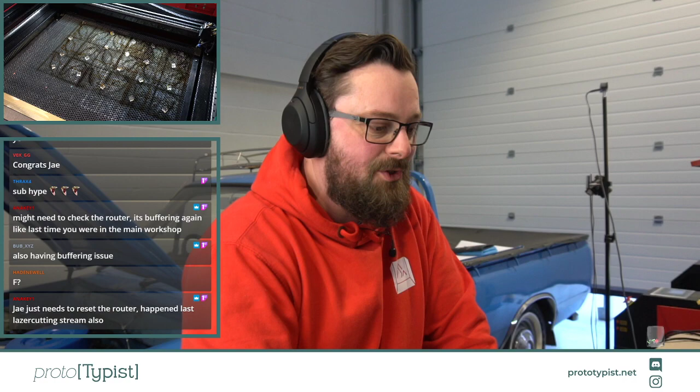Should be back, I should be back.

So it turns out the issue I had was actually the router - the Ethernet cable plugged into the router had come apart from its adapter. It's two cables plugged together, and the connector had broken. Well, I say broken - it's like a little dongle that connects two Ethernet cables together, and it sits right where the door is. The door had shut on it and cracked the casing a while back, so unless the casing is clipped together, sometimes the cable falls out. That's what happened, and it dropped over to Wi-Fi, and the Wi-Fi was dodgy with the laser causing interference. Anyway, we're back and we're live.

I've just run around and I'm out of breath now, but we are all cabled up again and we are back.

So as I was saying before, we are going to make a 3-tiered keyboard stand today. We're going to bust out Fusion, sort all that out, and make some cool stuff in there, hopefully. Bear in mind, guys, I'm not a Fusion expert, I don't use it very often, so this may be a slow process. It might take me a little bit of time to get there, but I'll try to show you what I do, and we'll get the laser cutter going.

You can see we have the laser just over here on the other camera, and you can see where I was cutting stands out of wood. I have some stands made out of wood that are just one tier effectively - these came out pretty nice and neat, pretty clean. I'm using these in my office for my personal collection of keyboards. These ones aren't for sale because they're not as strong as the acrylic ones. But today we're going to use this wood to create some larger ones, the 3-tier ones.

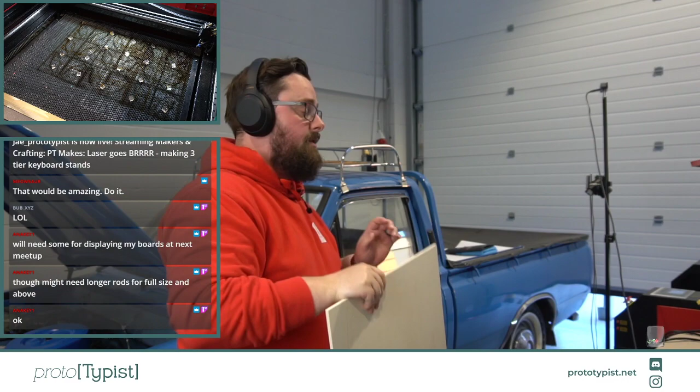Just bog standard plywood. We used this for the trays we did the other week when we made a jig for the trays, so we've got loads of this left over. We're just going to use this for the first couple, test it out, see how they go, and if they work really well, they'll be quite a bit more expensive than the 1-tier system. But if they work well, we'll make multiple. Maybe I'll have a very small stock of them on the store too. I don't know, haven't decided yet.

I'm still out of breath. I'm still exhausted from running.

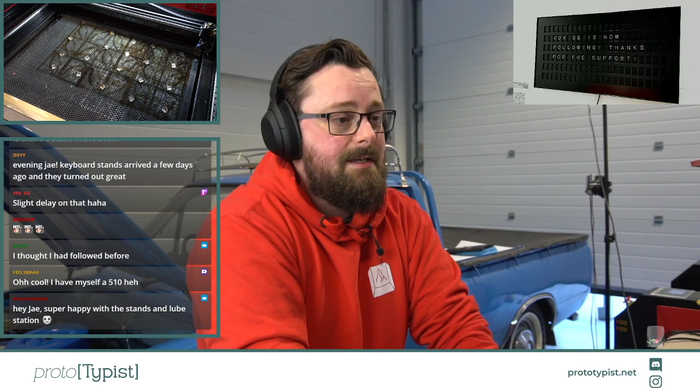FeelsBrah says, oh cool, I have a 510 myself. So I have a couple of Datsuns. I have this one, and I also have a Datsun Fairlady Z, a 1976 model, so it's a 280Z from Arizona, not California. It's an Arizona car but it's here in the UK. It's left-hand drive, but it's my pride and joy. It took me years to restore it, I absolutely love that thing. I also have another one, it's not a Datsun but it's a vintage Nissan, a 1965 P130, which is actually the line that became the Cedric Stroke Gloria line.

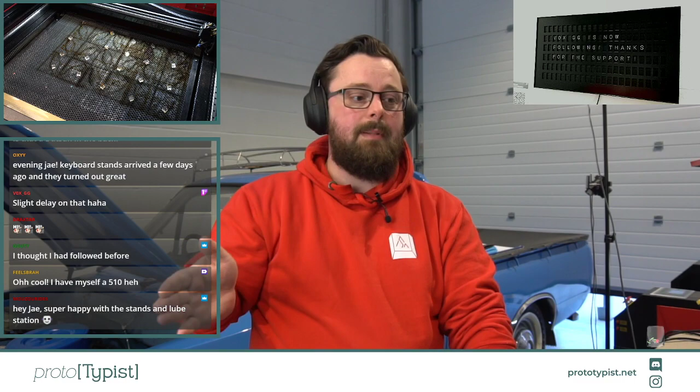Glad you got them, I apologize if I didn't put a note in your order or anything. I get so many orders for the stands, we've sold 500 stands in like a week. Every day I keep putting more of the black ones on because I had loads of black acrylics. So every day I put like 20 more on in the morning, and by the afternoon they're almost all gone - I think there's like 5 left on the store right now. And I only put 20 on. This is an example, this is just the left-hand sides, this is what's been cutting all day. I've got a stack like that, 2 stacks like that, so they'll be back on the store tomorrow.

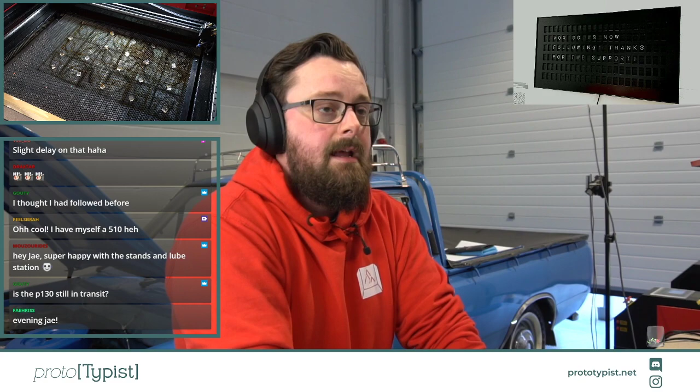Is the P130 still in transit? Yeah, it's still in transit - well, it hasn't actually got on the ship yet. It did have a bit of an issue, it had to go for a load of tests before they can ship it out of Thailand. This is basically an export test to prove it's going to be safe and reliable on the ship and all that kind of stuff. So it was going for that test, and the day it went, the area in Thailand had the worst rainstorm they've ever had, and the road the car was on flooded.

The car flooded, the engine flooded. Right now I actually have a little video on my phone of the guy who helped me buy it over there, paddling water out of the back seat of the car. It wasn't deep inside the car, but it was sat on the floor panels for about an inch, so he was paddling the water out. All of the electrics worked, but the car wouldn't start or turn over. So now the engine's being stripped down and rebuilt - it had bent and pushed a rod due to the extra pressure of water inside the engine. It was just bad luck, hugely bad luck all around. It wasn't the guy's fault, he was literally taking it to the test and bringing it back so he could export it and get the paperwork signed off. Then the rainstorm hit and the road he happened to be on flooded.

So the car at the minute - the bodywork's fine, all of the carpet's been ripped out, the water's been drained away, there's no rust, no damage or anything like that. The paintwork's a bit dirty but it'll all clean up and polish nicely. New carpet is getting put in, and the engine - the head's been pulled off, the pistons have been pulled out, the camshaft's been removed. The new camshaft has already arrived. The new pistons, rods and rings and everything else should be there early next week, then it'll be rebuilt and tested.

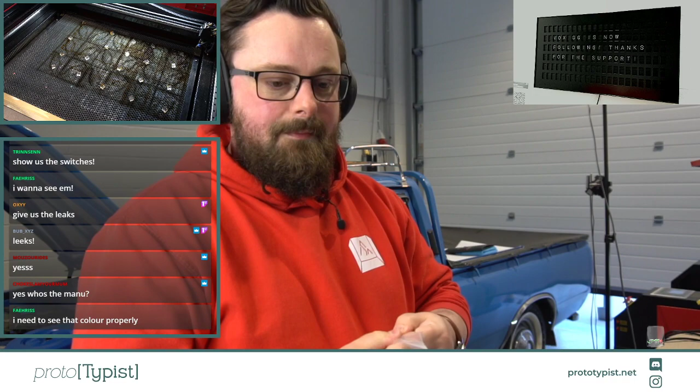Are you going to tell us the name of the switches yet? No, do you want to see the switches? I'm not sure I should, because I'm pretty sure they're secret and I'm not supposed to show them yet. Should I show them? Do you want to see them? These are like a new switch that I can't really talk about yet, I'm not sure when I can even put them in stock. Should I show them on stream? Let me grab a couple, let me find the box of them. Where did the box go? Here we go, okay, I got some spares. They're nice, they feel good too. Linear or tactile? Yes, they are one of those two options. They are not a clicky switch, but they might be linear and they might be tactile. Who knows? Do you want to see? Should I show?

Quite cute, translucent, a very, very pale blue. They are not ocean blues. These are not ocean blues.

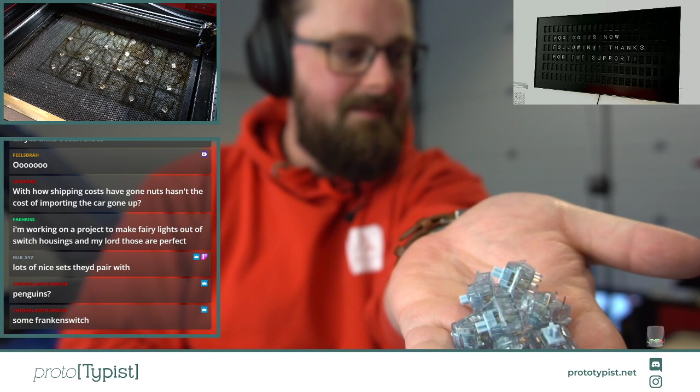They are really pretty switches. Like a group of them just looks great. Try and get it on the camera. There you go.

They're not penguins, they're not some Frankenswitch. These are in stock, I have thousands of them, like 15,000 of them, so I have plenty of these. Yeah, they're not Akko Ocean Blues though.

Shoko vibes, yeah, they will match Shoko very, very well. They will match Shoko really well. They're not penguins though.

With how much shipping costs have gone nuts, has the cost of importing a car gone up? So importing a car is really interesting. There's two types of way you can import a car on a ship. You can either get a container, put the car in the container, and then ship the container, or you can use a RoRo, which is a roll-on, roll-off, which is where the car's driven on, and then it's driven off the other side, like a ferry.

And container shipping has increased prices significantly. Like what used to cost me £2,500 to ship in a container now costs me closer to £20,000. That's how much it is. Like when importing stock from China, instead of paying £2,500 for a container, I'm now paying 20 grand for that same container, exactly the same container, no differences.

The roll-on, roll-off ships have actually stayed about the same in price, so it's only about 2 grand-ish, £2,000 to get a car over. So yeah, it would actually be cheaper.

This is the fun thing. It would actually be cheaper for me to buy something like a transit van in China, have all of the boxes loaded into the back of the transit van, and then roll on, roll off the car over on the RoRo ship and get that imported. That would be highly illegal, and I can't do it. But it would be significantly cheaper than current shipping prices, and that would include I'd get a free van, right? I'd get a free van, so that would be cheaper.

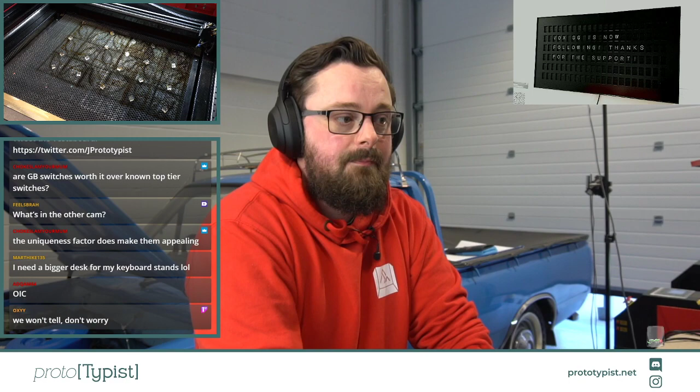FeelsBrah says, what's in the other cam? So in the camera, just up here, this is my laser cutter. Let's flick over to the other camera, you'll be able to see, so this is my laser cutter. We're going to actually be cutting some bits of wood later on, and I'll show you guys how that works. We're going to be cutting some plywood when we've done the design in Fusion, so we're going to do some Fusion design first, and then I will show you guys how the laser works.

The uniqueness factor does make them appealing. Group buy switches are up to you. Like there's so many in-stock switches, you know, it's a take your pick type of choice there.

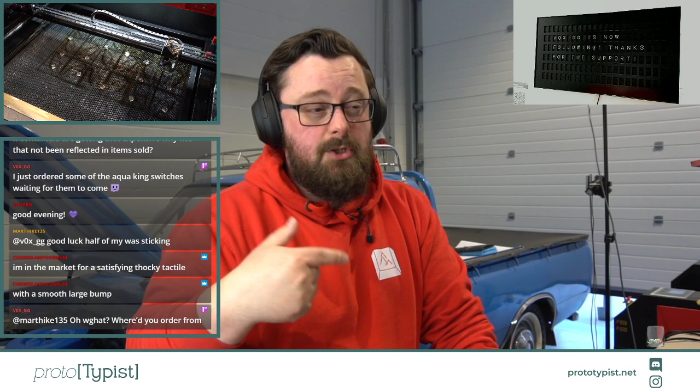So yeah, if containers are getting that expensive, why has that not been reflected in items sold? I think for a lot of stuff it has, for a lot of things it has. In terms of my business, the way it works is a lot of the stuff that we sold a year ago is now shipping, because that's just how long group buys take. And when I sold the stuff a year ago, the prices hadn't risen as much, so the prices didn't go up then. I'm betting now that the prices will go down before the stuff that's due to ship will ship, and if it doesn't, then I will just swallow the cost. Like that's all I have to do, I'll just have to swallow the cost.

Marthike says I need a bigger desk for my keyboard stands. Just buy more keyboard stands.

Vox says I just ordered some of the Aqua King switches, waiting for them to come. Nice. So thank you very much for being here, man. Good to see you, dude. Good to see you.

I'm in the market for something satisfyingly thocky tactile. I'm not sure if you saw how these depressed when I was pressing them, but you might be able to tell whether these are linear or tactile just from watching how they move when I press them. That might tell you whether it's linear or tactile. With a smooth, large bump. Interesting, interesting.

KP Republic, AliExpress, the top housings are too tight. Interesting, seems like a big boy bump. Who knows? Until I get them into stock, who knows?

I haven't actually tried them in a keyboard build yet. These only came into the warehouse yesterday, so I haven't actually done anything other than have my assistant Mel split them into packs of 70, 90, and 110. So Gouty, there you are.

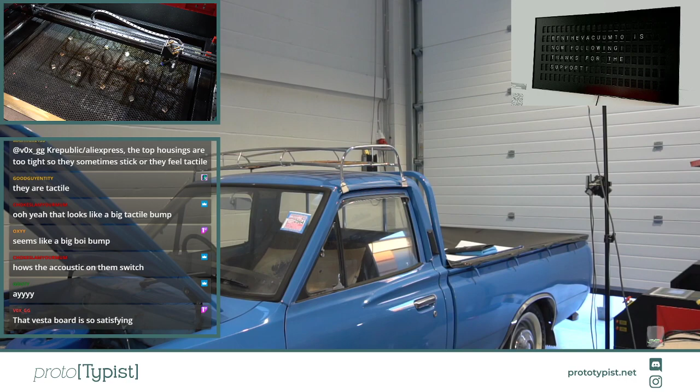But once I can, I will do. I actually have some other tactiles that you might like coming in stock as well. So these are a little bit different, I can talk about these. But these are POM Duroc linears, also called sunflower switches.

And these are all POM, like creams, but not creams. These are Duroc switches, and these are tactile as well. These have a really big bump on them. So there you go, you may be interested in those.

These are really quite interesting switches. These are the POM - I can't talk about the other switches, the pale blue-grey switches, but these are sunflower switches. These will be in stock probably early next week. They're all bagged up, but they just need to be counted and everything else. So yeah.

But I can't talk about these just yet. More news soon, but I can't talk about them just yet.

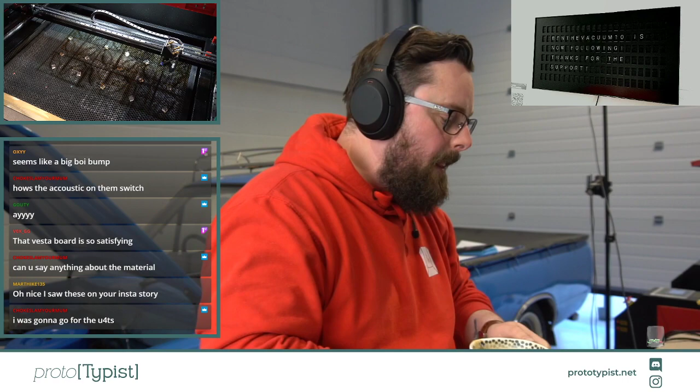Okay. So, what we need to do now is move over to the other camera and bring up Fusion so that I can show you guys exactly how we're going to work today.

Okay, so you should be able to see Fusion now on stream, and you should be able to see the original shape of the keyboard stand. So this is the keyboard stand that we currently make and manufacture, which is this here. It's actually the other side that you can see on. Because they have a logo on, we have to make sure that they're on the right side, otherwise the logos will be back to front.

So you can see here that they're actually cut in mirror images of each other, apart from the logo, which is changed around so that both sides show the logo in the correct orientation. New stands - well, these are the stands that we've made before, and that's what you can see on stream right now. You can see the same stands that we've made before.

But what we're going to do is we're actually going to create a 3-tiered system for these. So what I'm going to do is I'm going to edit the sketch that these are on. And bear in mind that I am not a Fusion expert, so I'm not teaching you guys how to use Fusion here. I'm just going to show you how I am going to approach this problem.

So because we're going to make these bigger, I know that I don't need the rear line or the base line for this keyboard stand. I have a reference point here in this corner. That's always going to be my reference point for where that flat horizontal line starts. I don't need to change that, but I don't need any of the other shapes here.

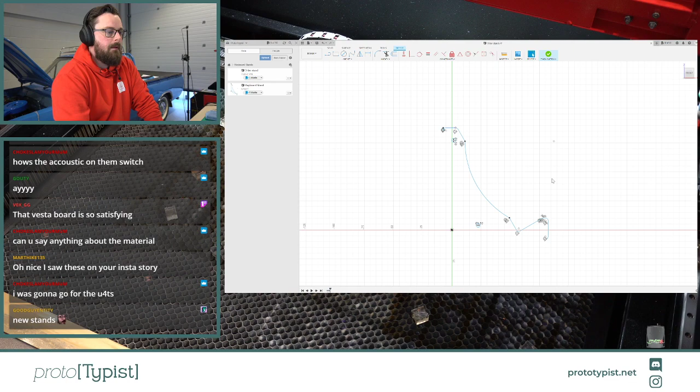So what I can do is I can remove all of the other shapes and just end up with what looks like a flat line running across the top of the stand. So for reference, that line there, that's selected and highlighted dark blue at the minute, that's this line here across the top there, just that little line there. And what we're going to do is we're going to actually replicate this part of the stand.

Basically from here onwards, this swooping curve, and then up and then swooping up here, we're going to replicate that and put it on top of this part here. So we're going to take that shape and put it up here.

What we're going to do is just edit this sketch and basically copy that shape across. We're just going to select the lines that we need. So we're going to zoom in a little bit, hold down Control, click on the lines that we want to select.

Make sure you get all of the lines. Not able to select this one. Zoomed in way too far there. Thank you, infinite scroll wheel.

And then we're going to just grab the same lines up at the top because we want to make this a 3-tiered keyboard stand.

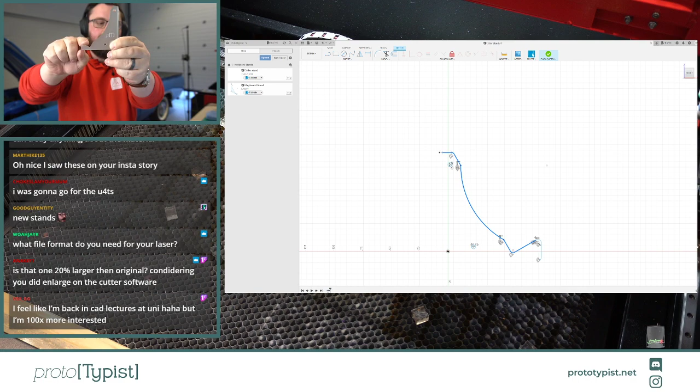Okay, so now what we've selected is that whole swooping shape here. We've selected basically the line down, the line up, and then across here. What we're going to do is take that and drop it onto the end of this line up here. So we're just going to literally copy and paste these in.

And we're just going to move that up and move it across, and line it up so it's nicely attached, he says. So you see, we're just going to attach this to there. It doesn't have to be perfect.

This is just a prototype. I'll get it perfect later on if I need to. I'm just going to bob that across. We're going to just drop it down just a touch because we want it slightly below, so we can put a radius in, just something like that.

Then what we're going to do is we're just going to delete this line here, he says. Okay, so now we've moved that shape over, we're just going to delete that.

Wait, where's that gone? Where's that gone? Okay, we hit the wrong button. We still got on paste? There we go. Okay, so we're just going to move that again because we are an idiot.

As I say, I don't use Fusion very often. I can barely wiggle my way through it at the best of times. And I'm not particularly accurate with it, but hey, we're good.

So we're going to move it to about here, and then all we're going to do is put a radius on this corner here, just to make sure it's all aligned nice and neatly.

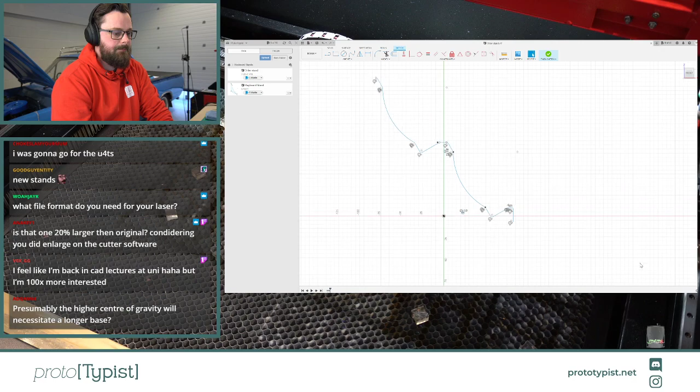So what we're going to do is we're just going to click OK, and leave that there. You can now see that we've basically got 2 stand shapes going up and up again. And what I'm going to do is I'm just going to join these 2 together nicely.

Now to do that, what I'm going to do is just delete that line. I'm going to insert a new line, but extend it further than it needs to be, so we're going to have a nice horizontal line.

And then what I'm going to do is extend this line first, and just extend it until it joins onto there. There we go. Now what we can do is delete this line here, and we can just join the 2 together.

The next thing to do is just add a radius onto the bump, so where it goes from one into the other, we're just going to add a radius onto that corner, using the radius tool just here. We select the 2 sides, and we're just going to keep all of the radiuses the same, which is 2.4 mil. That'll have a nice little fillet radius onto there as well.

So now you can see that we've got a smooth curve that joins those 2 together. Now we've done that, we know that we've got 2 lines here, so we can just delete them. We've got 1 line there and 1 line there that's straight. We can just replace that with 1 line.

Otherwise, when the laser's cutting, it will see them as 2 distinct shapes instead of 1 line. So we're just going to redraw that and make it as 1 line. And we should have that as a 30-degree angle. And you can see there, it is a 30-degree angle.

So there we go. Let's just catch up with chat.

The Vestaboard is so satisfying. Dude, I love hearing that thing tick around. It's so cool. Whenever I get a sale or someone drops me an email and it updates, it's so much fun. So much fun.

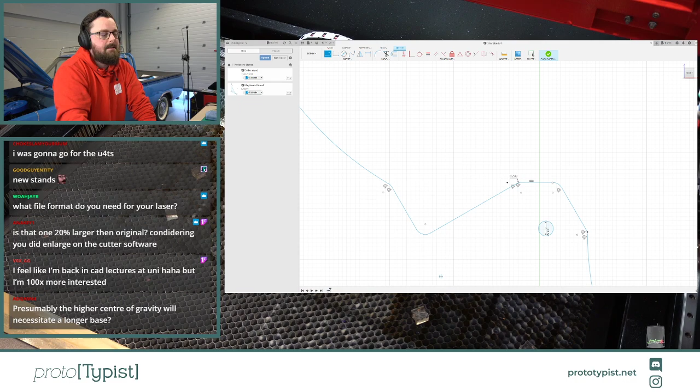What file format do you need for your laser? Basically anything that's a line drawing. DXF files work really well. SVG works okay too. Anything that's a vector graphic works really well. It's pretty good.

Is that one 20% larger than the original, considering you did enlarge it on the cutter software? No, it's not. I'll just enlarge it on the cutter software again, anyway. I could scale it in Fusion, but Fusion actually crashed last time I tried to do this because there are so many points and radiuses on it. So I'm just going to do it in the laser software because it's faster, especially for streaming. I feel like I'm back in CAD lectures at uni, but I'm a hundred times more interested.

Well, the interesting thing is I'm not a CAD expert. I basically learned from speaking to James and teaching myself, and I can do a few bits and pieces, but I'm not an expert by any way, shape or form. So everything I do is kind of made up, I guess. Yeah, it is what it is, but it's fine. It works.

Presumably the higher center of gravity will necessitate a longer base. Yeah, so what you've got to imagine is if we were doing two keyboard stands, effectively what I'm creating is that shape, right? But the vertical part is going to come down here where my hand is and then across. So we've got this huge square that now needs to be part of the stand as part of the material. And we've got to double that and triple it because of the next stand that's going to go up. So you'd have another square here, another square there. So you've got three of those big chunky squares that's going to impact the size of it. So yeah, it's going to be a big, big, big boy.

If it works, it works.

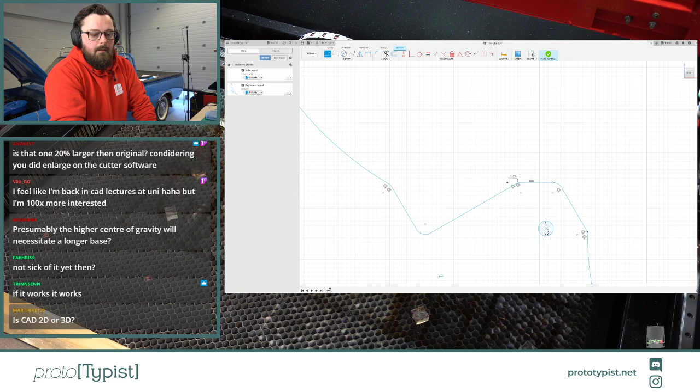Oh, Vesta's going. Let's zoom in on the Vesta cam. Oh, I can't show you that one. It's a sale, that's a sale on the site. I shouldn't show you that one. There's nothing you guys can see or do about it, but I really shouldn't show you. It's not fair.

If it works, it works. Hey man, yeah, that's exactly it. Like, I can just about get by in Fusion.

Is CAD 2D or 3D? Fusion can be both. At the minute I'm just editing a sketch in Fusion, and a sketch makes it a 2D plane that we're adjusting. But we could absolutely adjust things in 3D if we wanted to. We just don't need 3D for a laser cutter.

Okay, so back in Fusion, now we've got one in. What we're going to do is add the second one in, and do exactly the same process. So I'm just going to paste another row in, and we're just going to move this one up. And as you can see, we've got that nice, lovely shape there.

Now what I'm actually going to do is, do you know what, I'm going to undo that. And the reason I'm undoing that is because I'm just going to copy this line and paste this line. Well, I'm just going to check how long this line is first. So this line is 7.294 millimeters, which is fine because it's 8 millimeters end to end. It's just the radiuses that are taking off of that.

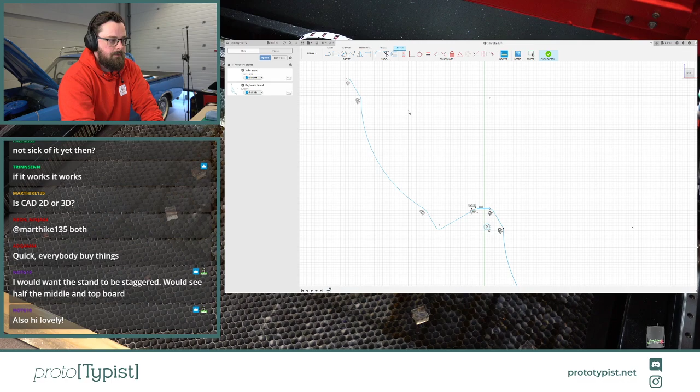So what I want to do is draw a line horizontally across here. So we're just going to come up to this top part. I'm just going to draw a line horizontally, and I'll just leave it there. So now we've got a horizontal line that we need to match. Basically all we're going to do is make sure it's exactly the same position for the next one, which was 7.294 millimeters.

So then we can paste in the parts that we've copied again, and move these up again. So you can see that we're creating this shape on top again. We're going to zoom back in.

All I'm going to do is just make this the right position. So this will be about there, I think. We're going to hit enter and click OK.

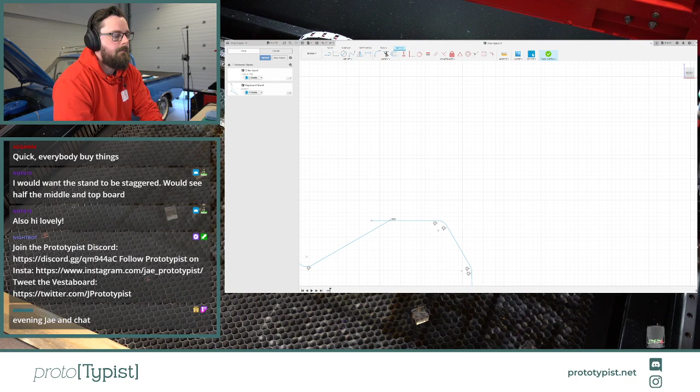Then all we're going to do is delete this line and draw in our new line. That should be... oh, it's not horizontal. Okay, so we're not going to do that actually. Let's undo this, I thought we got that horizontal. Just undo that. Okay, this is, as I told you guys, I am not a master of this. I learn on the fly when I do these things.

Okay, so let's make that 7.294 millimeters in length. Let's do that first.

There we go. Okay, so then we're going to paste in those again. Now we're going to drag them up, move it across, and then we're just going to drop this just underneath, just like so.

So now it's in place, we're going to click OK, we're going to leave that there. This is exactly how we did the previous one.

What we're going to do is just delete this line here, even though we know it's the right length, we're just going to delete it. We're going to join a new line that's horizontal, and this will allow us to make sure we get the right lines in place.

I'm going to delete that line as well. In fact, actually no, we're not. We're going to just adjust that line up to here, keeping the same angle. Delete this line that we put in.

Rejoin the two lines across. And then we're going to add in our radius, which is 2.4 that we use on all of these.

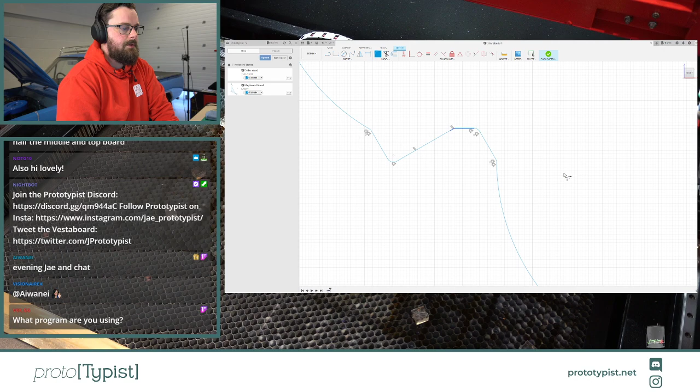Then we're going to delete the two parts of this straight line here, just like so. And then we're going to rejoin them together. We get a nice 30-degree angle that way, and we keep the line nice and flat.

So now we've done that, we can start to see how big this stand's going to be. So we're going to add our line back at the top, our horizontal line that we need for the top part. This was actually 10 millimeters that we had on the original. So put that line back in.

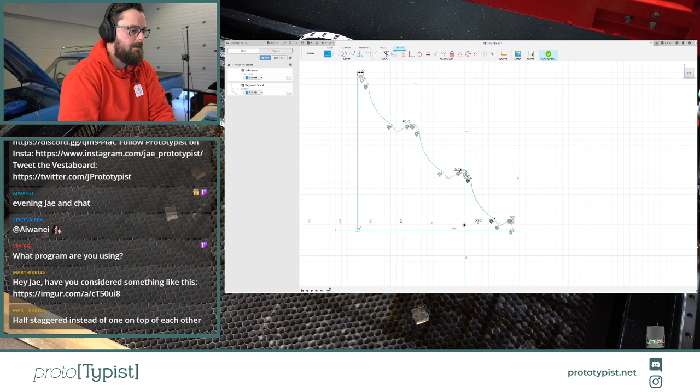What we can do now is just draw a line across from the bottom on this point here, and we just want a nice horizontal line that's going to go past where we need it to. Then we can just join the top case back down to this line, perfectly square, get it at 90 degrees, delete the bottom line, and then rejoin those two lines up.

Okay, Vestaboard is updating. I kind of missed showing you guys that, but let's show you what it says. Tinkertronic says: laser go pew, math make brain go ouch, plywood smell nice when burned. There you go.

Half staggered instead of one on top of each other. Yeah, this is just because this is how I was asked to do it. I was asked to do one that tiered them 3 up rather than staggered heights, so I'm just doing this to comply with a customer request, not exactly how I would necessarily want it.

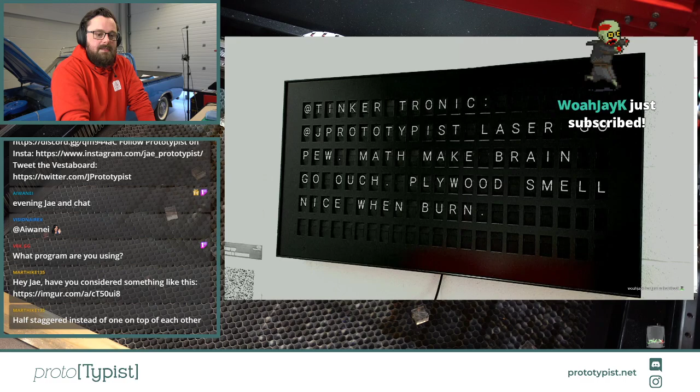Gio says, I would want the stand to be staggered, would see half the middle and top board. So these aren't staggered, this is kind of like, it is still staggered because the boards are always going to go past the top of here. Like this isn't the height of a board. The boards will always go past the top, so they're going to stand proud of that.

Let me find a board, let me grab a board and show you. So when a board's set on here, the board goes higher than the stand, so you're always going to see the next board is slightly behind the board a little bit. Slightly behind the board below. There you go.

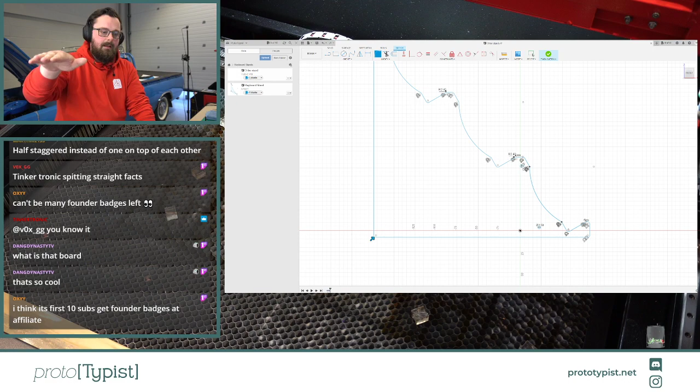Okay, so going back into Fusion then. Now we've got the top and the rear. All we need to do now is create our radii for the corners again, so we're just going to drop those in here. We want to change those to 2.4 millimeters because they look nice on the stands, and I like everything to be the same - that's what all of the curves elsewhere on this are. So we're changing them all to 2.4 millimeters. That's what felt the best.

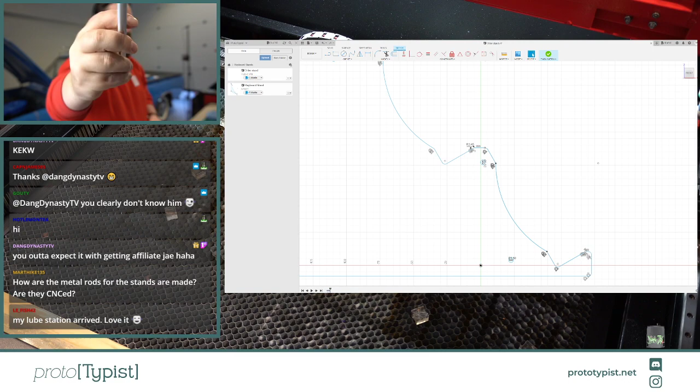How are the metal rods made? Yeah, they're CNC metal rods. The metal rods we use here are threaded - well, they're actually lathed, not CNC'd, but, well, they're not milled, they're lathed. They're probably still CNC'd, but you can have different types of CNC - that's just computer numerical control. Technically the laser is a CNC laser cutter because it's computer numerically controlled. But the rods are basically aluminium that's turned on a lathe to make them perfectly round, and then threaded on both ends with a 3.5 standard threading.

So yeah, there we go. I don't make these in-house or anything like that, I'd buy these pre-made, but yeah, they are aluminium.

Okay, so back into Fusion. What we're going to do now is make sure we've got some more of our holes in the right places, shall we say. So I'm just going to draw a horizontal line from the center of this hole all the way through to the back case.

We're just going to keep that completely horizontal, and draw that line in place. Then we'll do the same from the center of that circle all the way over to the far back wall, keeping those lines perfectly straight.

The next thing we're going to do is draw a line from where we want the next one to be, in the center of this gap here. We're just going to zoom in a little bit, and we can see that the previous one is about here. I'm just going to draw down, and that gives us a new reference point for that one there.

Then we're going to put the next one just around the center here. So we're going to zoom in, pick the center point, which is there, and scroll down. Okay, that gives us some new points to put some more mounting holes in.

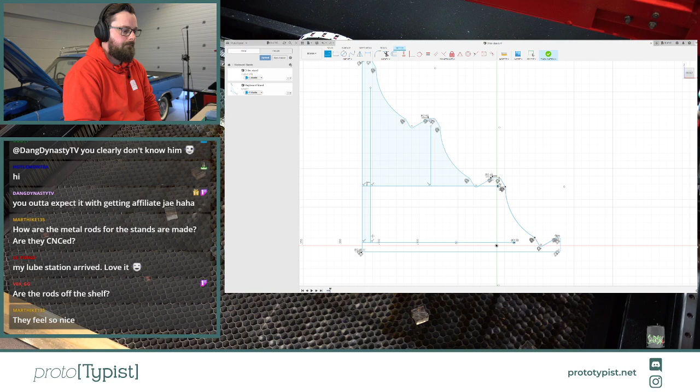So then we're going to copy the circle we have, which is the right size hole. We'll come to this point here. Actually, we're not going to copy it, we're just going to create new circles. So we'll do new ones at 3.5, type that over, hit enter, and then we have a new circle there.

And then we're going to do another one up at the top here. We've got our center points, so we'll do 3.5 and hit enter. We've got a new one there. And we're going to come over here and do the same, 3.5.

Okay, and now what we have is 1, 2, 3, 4 mount points where the stands are going to go. We're going to have one point in the back corner, which means we have two on the rear and two on the base. That should be enough to hold it solidly.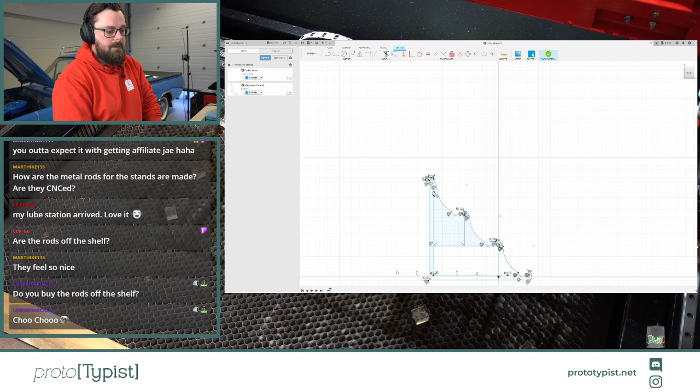What I'm tempted to do is, if it needs it, put another one right in the very center of the square gap. So if the prototype doesn't go well, I may put one pretty much dead center around this point here, just to support the central function. But I think this is going to be strong enough as it is.

Now we can go away and delete all of our straight lines, because we don't need those anymore. We don't want to cut those in.

Okay, and now we've got all of that in place, we can finish the sketch. And there you go, guys, you can see the shape that we are going to cut. That is going to be the shape of our keyboard stand.

All we need to do now is export that. We're going to export it as a DXF, save it to our desktop, and call it Tier 3 stand. And that's it, that's all the time we need to spend in Fusion today, assuming that it works.

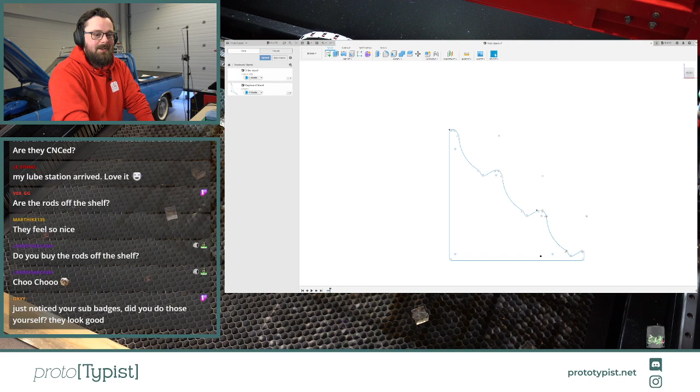Okay, so now we've got the design. We've exported it from Fusion. We can save this, and we have a design in there. We don't need Fusion anymore, so we're going to close that down.

What we do need, though, is Lightburn, which is our laser cutting software. So I'm going to show you guys Lightburn now. What we can do in Lightburn is import the file that we've just created in Fusion, and we can actually make a keyboard stand.

So, or I would do it if I could find it. There it is, there's a file. I'm just going to drop that in. In fact, now it's opening Adobe Illustrator. I don't want to do that. I must have double clicked it by mistake. Typical Jae. Okay. Go away, Illustrator, I don't want that. Right, Illustrator's gone. So now I'm just going to drag and drop the file in.

So you can see it's come through upside down, we can fix that. The first thing we're going to do is rotate that. So we're going to arrange it, rotate it 90 degrees clockwise, and rotate it another 90 degrees clockwise, and then you can see we have one side of the stand.

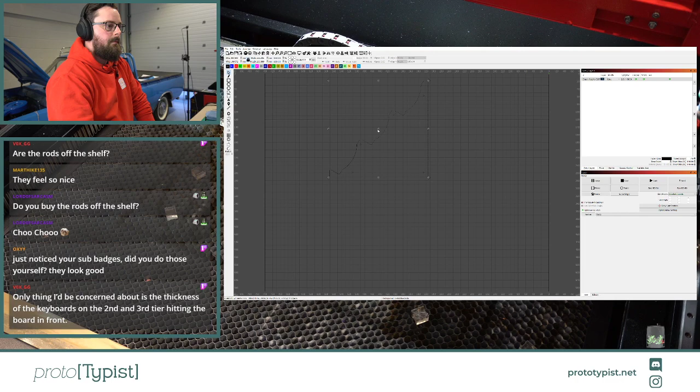So that's going to be the left side of the keyboard stand. And I'm just going to move that as a whole to about there. Then what we're going to do is select that whole part.

We're going to copy it, paste it, and then flip this one. But we're basically going to mirror it, so we've got the mirror side of it. We're then going to move this one so it's in line with the first one, putting it relatively close.

Okay, there we have 2 keyboard stands. I'm going to put that right up to the point of the laser where it can cut it nicely, which is just about there. The first thing we're going to do now is set our material that we're using for this. So I have a plywood 6mm cut marker.

That's the colors across the top that you can see in the software. Those alternate different parameters for different materials. So that's what we're going to do. We're going to cut those.

Next job is to just add a logo. So we're going to add in our logo. I'm going to use the full prototypist text for this one, and we'll see how that goes.

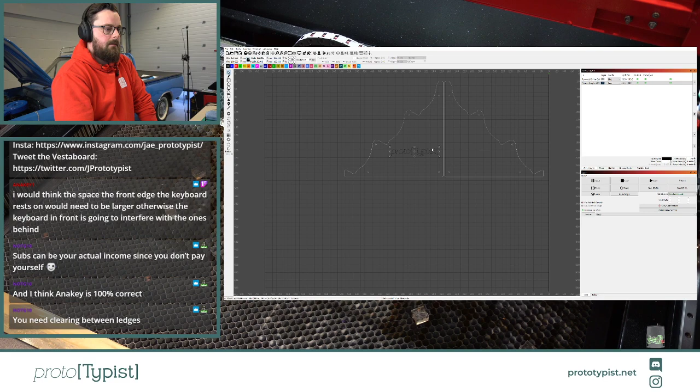This is just going to be the prototypist logo that we're just going to drag and drop. Going to make that slightly bigger, and we're going to put that just in here. Maybe make it a touch smaller. Actually, these are going to be quite big, don't want it to be too big. We're just going to touch that down and put it in the bottom, just like so.

And then what we're going to do is select that again, copy it, and put the same thing just here. So we're going to make sure it's leveled when it's the same height. And there you go, we can see we've got those.

We're now just going to select both of these and turn them into a wood etch. So I have an etch setting for wood. That's why you'll see that they're red rather than the white line. The white line means it's going to cut. The red line means it's going to etch.

Okay, so you can see we've got a left side and a right side. So the logo is going to read the same whichever way around we put the stands. So you're always going to be able to see the logo and it's going to cut nicely. We're going to make sure we do the etch first, and we're going to move that to the top.

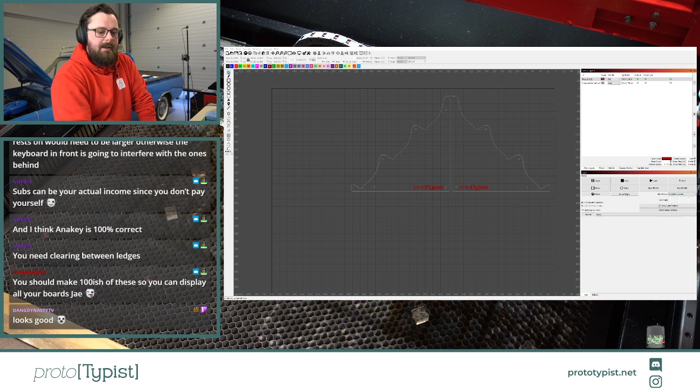And you can see that now we've put on the right-hand side of the screen, you can see there's two colors and two bars on the right-hand side. That's got the red bar at the top, and then it's got the gray bar underneath. That means we're going to do the etch first, and then we're going to do the cut.

I would think the space the front edge the keyboard rests on would need to be larger, otherwise the keyboard in front is going to interfere with the ones behind. It shouldn't do because they're all on a 70-degree angle. You've got to remember that where these are going to touch is going to come up here. No board's going to be that thick, I don't think.

That's pretty deep. And if it doesn't work, hey, that's why we prototype. We learn from the mistakes and we can adjust it later on if we need to. That's the whole point. Let's try it and see where we get to. If it doesn't work, it doesn't work - we've just messed up a little bit of material.

You think Anakey is 100% correct? Maybe. We'll see. We've got to fail fast, guys. We've got to try it, fail, and learn. That's how things go.

So if you think about this, guys, how it's going to be set up is you've basically got this shape, and then you have this shape on top. If you look at how that's set, if I can hold it in position, the board would have to be very thick to actually catch on that. I think it's going to be okay, and if it's not, we'll adjust it. That's why we prototype.

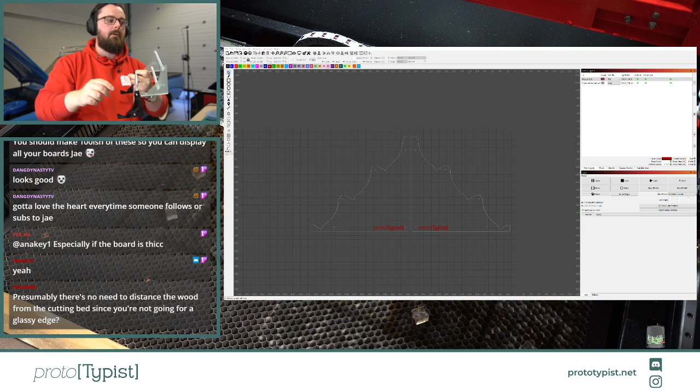Presumably there's no need to distance the wood from the cutting bed since you're not going for a glassy edge. Correct, I don't need to distance the wood from the bed. So you'll see that I'll take out the little standoffs when we get to that point as well.

This is going to be a big boy stand. Yeah, it's going to be huge. But hey, let me put it this way, guys - the stream would be really boring if I did this and it worked first time, right? It'd be very boring.

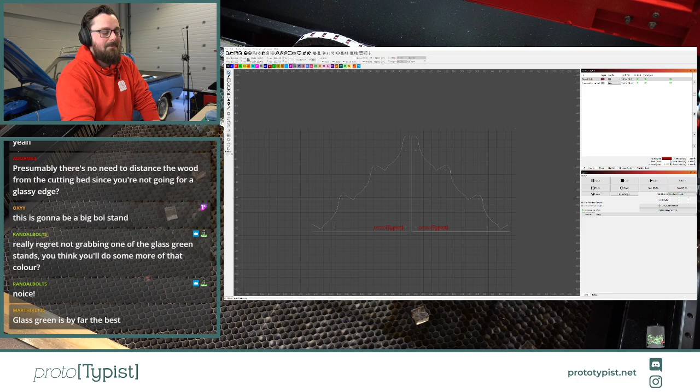Okay, so let's test this out and see how it goes. We're going to cut this on the laser cutter. Now we've got LightBurn all sorted. I'm going to remove that.

You'll see now that I just need to come over to the laser cutter and take these standoffs out because we don't need these. Just going to move the laser out of the way. We're going to take our piece of material and pop it into the laser cutter.

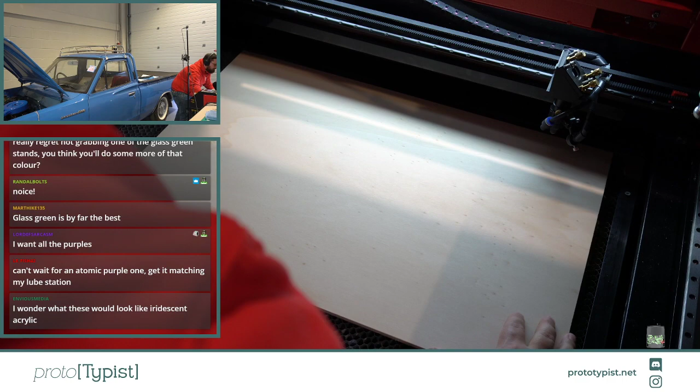Now we're going to set the height of the material using our focus laser tool. The laser needs to be exactly the height from here to the base of the material. So if we stand it on the material, the laser needs to sit on that ledge, and that's how we determine we've got the correct focal height.

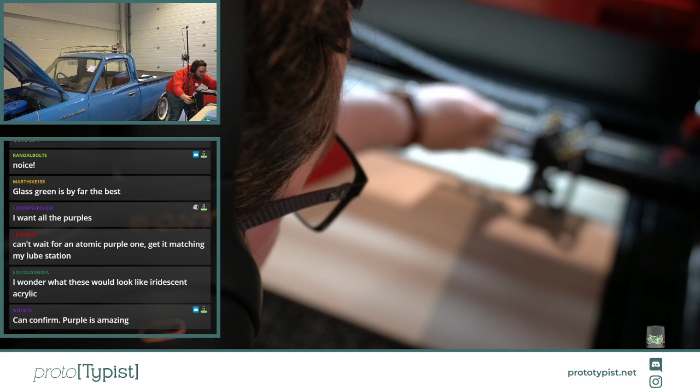You can see here that the material is way too low, so we need to raise that up. Now what we're going to do is just raise up the cutting edge - probably can't see it moving. Just going to make sure that's just touching there. We're going to move it to the center of the material and make sure it's still good.

All looks good. So now we've got the focal height of the laser. We're good to cut.

Now I'm going to send over the file to the laser cutter. So now the laser has the file. What we're going to do is just check the settings on the laser, make sure it understands exactly how it's going to cut things.

And then we're going to frame the design. What the laser is going to do now is draw an outline of where that part's going to cut, so you can see how big these are going to be. I'm going to get one stand out of one sheet of material. We're going to turn on the light just so you can see where the laser goes - that's where the part's going to cut.

It's going to be a chunky boy. So now we've tested all of that, all we need to do is set it going.

And as I say, it's going to do the etching first. It's going to etch in the logo first, and then once it's etched in the logo, it's then going to cut around the whole shape on the outside.

I wonder what these would look like in iridescent acrylic. I've done some in black acrylic just here, and some in glass green acrylic, which is my favorite. This is going to be the stock standard color, but yeah, I do have some other acrylics that I can try in the future.

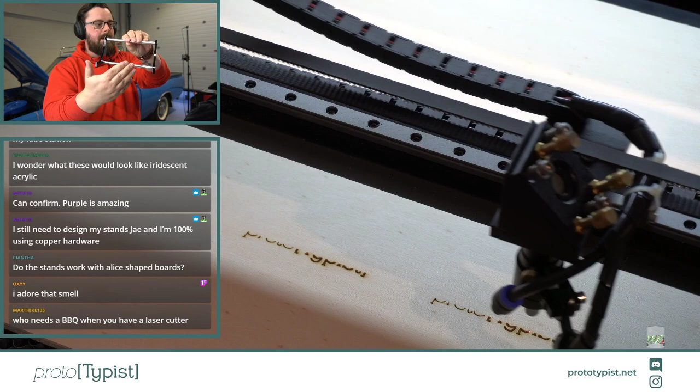The stands don't work with Alice-shaped boards, no. They're actually too low, so what happens is the dip in the Alice board actually hits the desk underneath because these aren't particularly tall. I could create some that would be Alice enabled, but they'd actually have to be a lot taller, so it wouldn't be quite as nice aesthetically as this.

So yeah, we could do that. If you wanted something like that, Ciantha, then you could always message me, drop me an email, j@prototypist.net, and I could create you one. I could make you one that would do.

You could put the stand on a small riser, but it'd be easier to just make one that works, right? Just make one that's right.

TPU feet that slip on. Yeah, we could print some. We could 3D print some. The 3D printer is actually printing right now.

I wonder if I can share with you the 3D printer doing what it's doing. Let me see if I can actually do that. I could have a 3D printer cam on. Let me see what I can do with this. I might be able to turn on a little camera that does 3D printing, and you can see the 3D printer running around in the corner as well. Let me see if I can get that up. I'm not promising, but I'll see if I can.

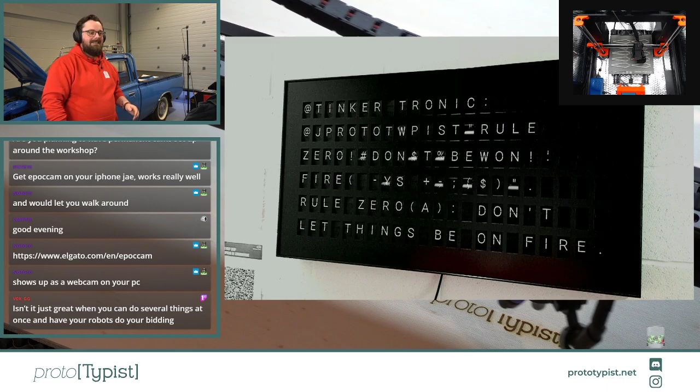Oh, the Vestaboard is going. Rule 0: don't be on fire. Rule 0A: don't let things be on fire, right? Didn't seem delayed at all. Usually it's literally no delay. Wow, there you go.

Cook steaks with a laser cutter? I could, but it'd be crap, right? It'd be really crap. It'd be really, really crap, but you could do it.

Am I planning to have permanent camera setups around the workshop? Not camera setups, but what I'm going to have is stands with cameras in certain positions. For the laser, you might just be able to see this red dot here - that's the edge of the laser. I'm going to mount a camera to the inside of that, so we'll get a top-down view. I'll just put a mount there, and I'll put the camera onto the mount each time. This mount here for this camera will stay where it is.

Both the 3D printers already have cameras. I'm going to jury-rig a camera for the laser - you can see this tall pole here, that's where the cameras are right now for the laser cutter and for the Vestaboard. But over on this far wall, see this bar that runs across? I'm going to mount a camera to that, which will look directly at the Vestaboard, and that's going to be permanently turned on.

So yeah, we're not going to have permanent cameras all around the workshop. We are going to have cameras that can be moved and changed. When I finish building my streaming table, which the parts are over there for, the cameras will all mount to that as well - the face cam and everything else will mount to it. So wherever I go in the workshop, I'll be able to take you guys with me, and you'll be able to see. We'll be able to do all sorts of stuff around the workshop instead of just being in this one position.

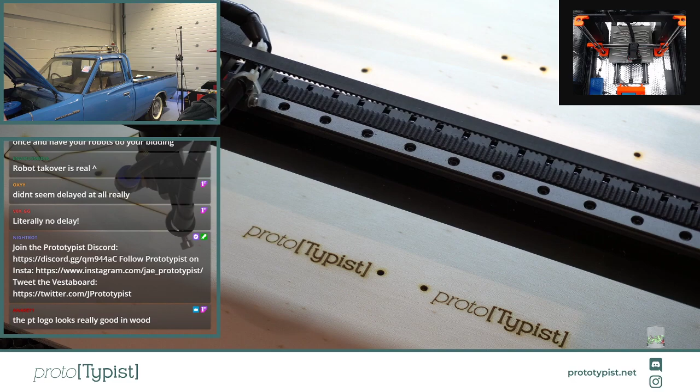The PT logo looks really good in wood. Yeah, it comes out really nice. I'll zoom the camera back out actually.

So you can see these are going to be chunky boy stands. It smells really strongly of wood now. The door's supposed to be closed for this really - it should really be closed.

6mm plywood. You can see the smoke - that is smoke, it's not on fire, but it is smoke. It's smoldering.

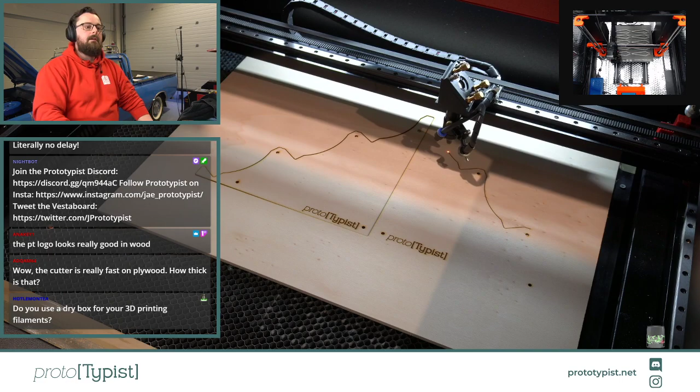What you can't see is that the 3D printers are actually in cages. I don't need to use a dry box because the 3D printers have heated elements - they're in heated boxes, always kept at a balmy 22 degrees Celsius, kept to a dry standard, and they have pressure gauges and all sorts in there to tell me if the air is moist or damp. So I don't need a dry box because they're in a dry environment inside the cages I use, which are basically old server cabinets that I've retrofitted and insulated to make sure they work. You can see the insulation, the silver shiny surface, that's the insulation in there.

I do have a bunch of rolls of filament, yeah. And I don't open rolls until I use them, no. Correct.

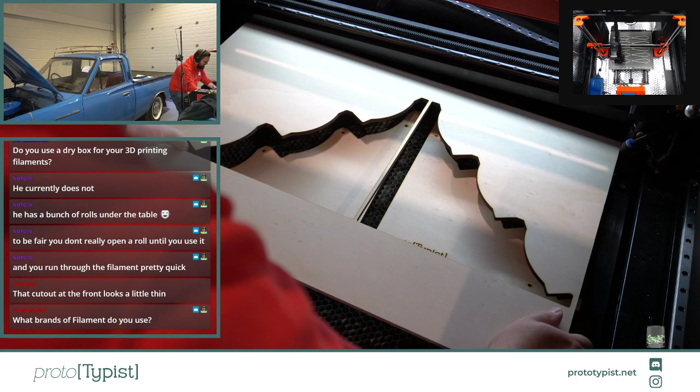Oh, why is it cutting that line twice? It's not supposed to cut that line twice. Interesting, but there we go, guys, we've now cut these. Someone asked, has it really cut? Well, here's the test - if I lift this up, what happens? Oh yeah, you can see it's cut pretty cleanly. And there we go, it's all gone.

Okay, so I'm going to flip the cameras back around. So you can see now, guys, that we have a 3-tiered stand prototype. This is a prototype, remember, guys.

Just to compare to the original - it's a bit of a big boy. The cut out at the front looks a little thin. No, it's the same size as that. It's rock solid, that's not going to go anywhere. It's going to be more than fine, it's going to be absolutely fine.

But this is cut all the way through, 6mm plywood, nice edge on it, not too burnt either. You can get it so it actually turns it black, but as you can see here, it's pretty clean. Same here, pretty clean all the way around. You can see the bonding layer has burnt a little bit more.

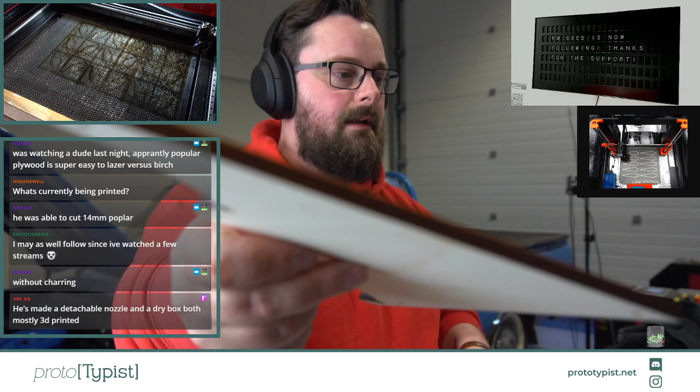So it doesn't really char as such. I mean, it burns a little bit, but it's going to burn anyway, it's a laser. What it does do is char the adhesive bond between the layers - that's what makes a dark line.

Okay, so now we've got the two halves. We can see it's going to go like that. Let's just screw this together and see how we go. I'm just going to grab a few screws - these are M3.5 by 8mm. And let's grab a screwdriver and see if we can put this together and see if it holds together.

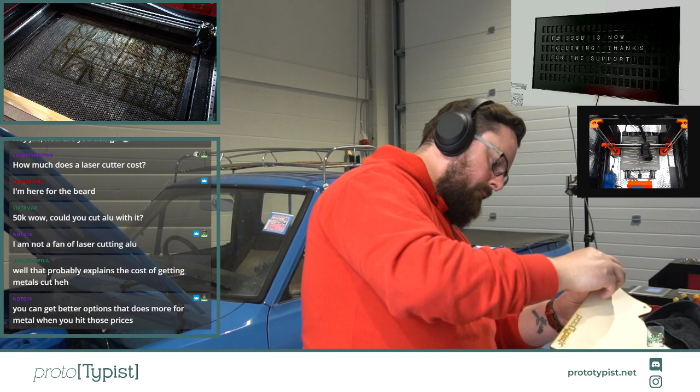Okay, screw all these down tightly now that they're all thumb tight in. Okay, last screw.

And here we have a 3-tier keyboard stand. It feels pretty rigid. I don't think it needs a central support. I did wonder if it'd need a central support column, but that feels pretty strong, enough to take the weight where the keyboards are going to be. Plenty of rigidity at the back, plenty of rigidity across the base.

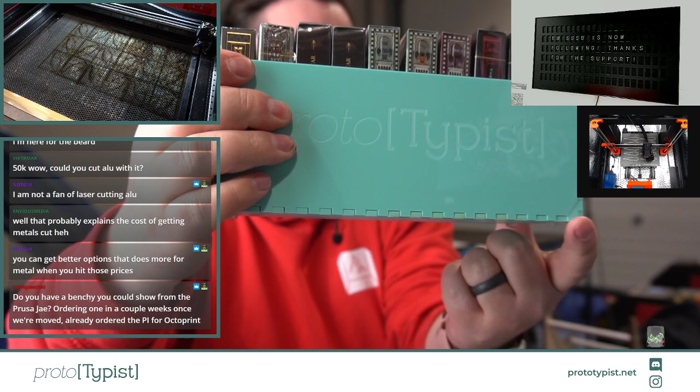If we wanted to, what we could actually do is a stepped pattern across here and actually put a proper base on it. Make something like this. Something like this for the base, where you can see this stepped pattern here. Excuse the crack at the end where I broke it, but a step pattern like that - we could actually do that into the wood as well if we wanted to make it like a full solid stand. But this works pretty well. This works really well. Very, very happy with that.

The test now is, does it fit 3 keyboards on it? That's going to be the real test. So I'll have a test of that in a minute.

I'm not a fan of laser cutting alu - it depends on what you're doing with it, some things it's good for. That probably explains the cost of getting metals cut. Yeah, that's why you get charged 50 quid for a plate from Laser Boost, right? Because they have a £100,000 laser.

You can get better options that do more for metal when you hit those prices. You can, it's true, you can.

Are you going to use the aquacolor material again for anything? The aquacolor, do you mean the green glass? Yeah, the green glass is going to be the stock color for these. These are going to be back in a couple of weeks' time. I've got more material on the way, if that's the color you mean.

Captain James says, do you have a Benchy you could show from the Prusa? Ordering one in a couple of weeks once we're moved, already ordered the Pi for Octoprint. So you can see actually in the 3D print box, there's a little blue square in the bottom corner - that's my Raspberry Pi. Each one has its own Raspberry Pi, and I do run OctoPi from there as well. But yeah, I can grab a Benchy and show you a few. I do one in pretty much every new color that I print. Let me grab a couple of different materials and show you.

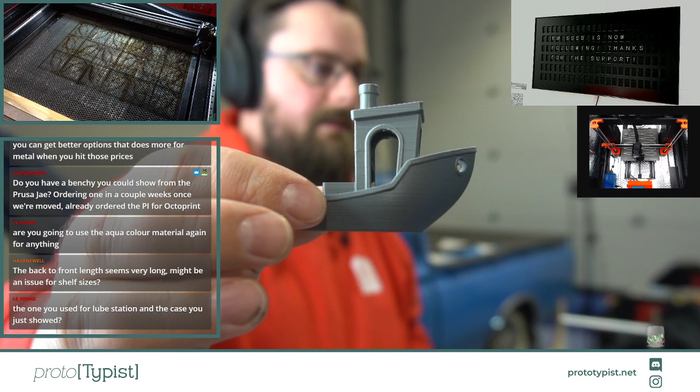And then this is the current status - this is the latest Benchy that came off. Again, zero post-processing on this, zero post-processing on that at all. That's just straight off the printer bed.

Pretty good. I can actually show you something else that I printed, which came out really nice. It has had a little bit of post-processing, so you can see what it looks like after it's been post-processed ever so slightly.

This is a puzzle from Maker's Muse, an egg puzzle. It's not solved at the moment, and it's very, very slightly post-processed - all I've done is go over it with the heat gun. But you get these amazing parts, so you can see this is like a puzzle that all slots together.

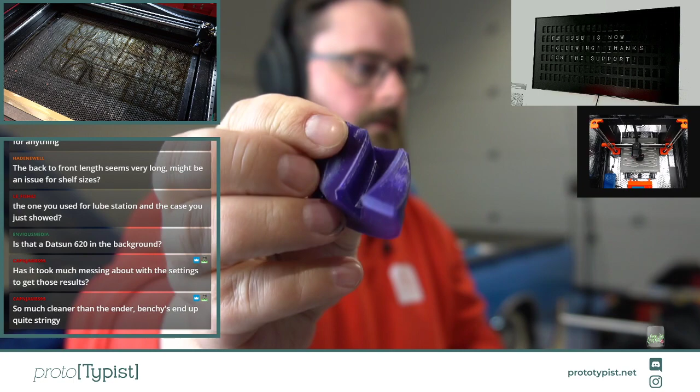And this is the kind of level of quality you get on the print. This is in Galaxy Purple filament, this is Prusament. So this is no sanding or anything else, just heat gunned off of the machine.

So there we go, this is just something I 3D printed. We're just talking 3D printers at the minute. This is an egg puzzle I printed off of Maker's Muse. You can see just how good this is, print-wise. This is really good quality, and it's so smooth that everything spins as it should.

There's very little friction there, it moves nicely. But that's the kind of quality you can get out of a 3D printer.

So that's what it looks like, slightly post-processed. This is with no post-processing - the standard stock Benchy, straight off of the machine as it's currently calibrated.

So there you go, you can get some really nice details. The Prusas are amazing for the value for money.

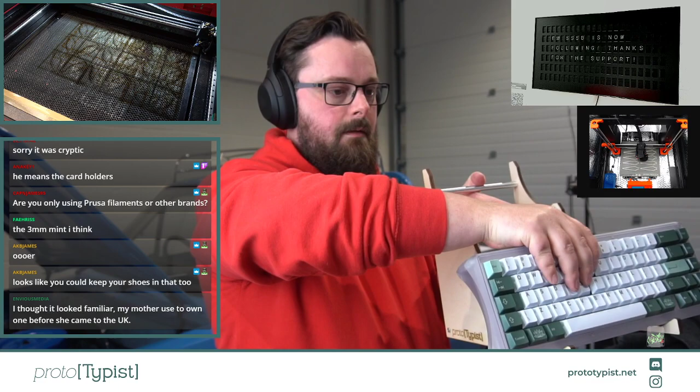So I have my polycarbonate Dollinger here. That looks good. The question is, is another keyboard going to work just here? Let's go get some more keyboards. I'm going to try and pick light keyboards, otherwise this is going to get very, very heavy very quickly. Let me grab a couple of light keyboards and see how it goes - trying to find ones that are not super duper heavy, but I don't want to pick something that's too small either.

Okay, so as well as the Dollinger, oh, Vestaboard time.

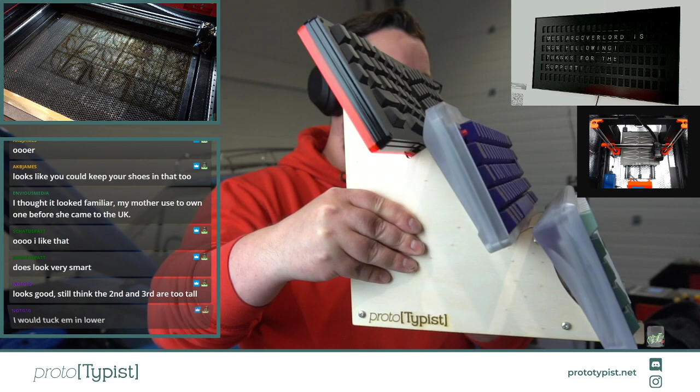You'd tuck them in lower? Maybe. This is how I was asked to design it, so that you could see each one tiered up, not staggered like half and half. So yeah, can I try it with 3 TKLs?

I'm not sure I have 3 TKLs available, but let me see. I can put a TKL in the middle and see how that goes. How's that sound? Let me grab a TKL and I'll show you guys that. I think I've got one in here. Do I have one in here? Yes, I do, I have one.

Okay, so we now have a TKL. Let's take out the polycarbonate canoe. That's the canoe, just going to pop that to one side. And then we're going to pop the TKL in the middle.

And then we're going to try and pick this up again without dropping it. If I drop this, guys, I'm not going to be happy. It's strong enough, but it's super duper heavy. There you go, guys, see how it offsets it from the board? It's not going to touch.

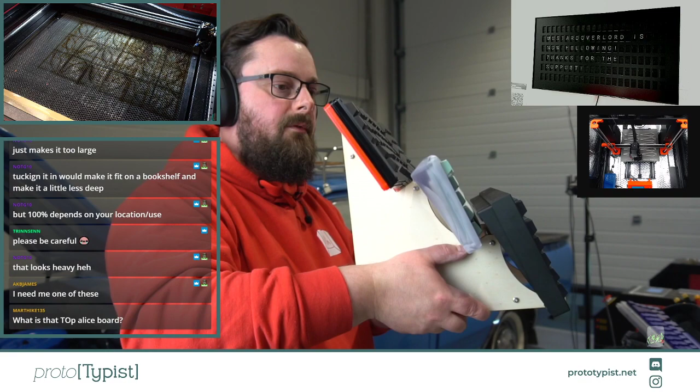If I'm wary of any position on this, it's this one. Oh gosh, that's so heavy. So there you go, guys, you can see it's got about 8 mil gap between the rear of one board and the start of the next. So you can see it would fit 3 TKLs on it quite nicely. So there we go.

Oh, you guys of little faith earlier on as well, telling me it wasn't going to work. Man, that's so hard to pick up. Let me take a couple of boards off this.

So this was the Lubrigante, which is basically an Alice style layout. And then we had the polycarbonate Dollinger, which I built on Sunday, which I am absolutely in love with this board, it's so good, it's so nice. And then we had the polycarbonate Canoe as well, with laser - it's the only board I've ever put laser on, actually.

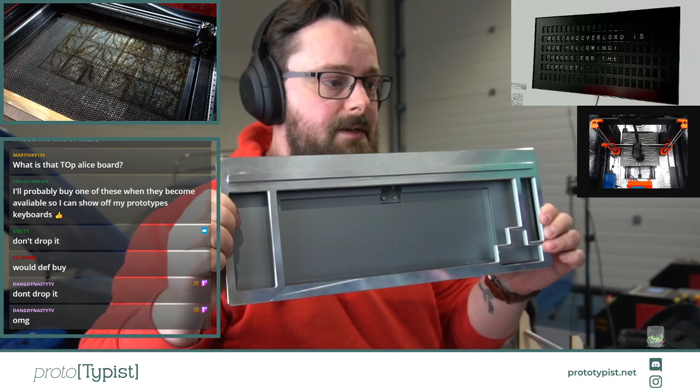Someone also asked me if you could fit a full-size board on it. I don't have a full-size board, but I do have a J01 prototype. This is a J01 Rev 1 prototype, which is why it's just in raw alu. And I'll show you guys that that sits on here just fine, but they'll be too heavy if I put the TKL on there as well. So I'm going to remove the TKL.

And this isn't screwed together either. The two case parts are not screwed together, but you'll see that these are nice and wide, so they hold a full-size board just fine.

It's full of fingerprints though, James. Like, it's absolutely covered in fingerprints. If you want this, James, you can have it, you can have this top case. Yeah, look at the fingerprints. I guess you could polish it up if you wanted, but I handle this a lot.

Yeah, there you go, custom fitted gaskets all the way around. Look at those mill marks on the inside. And this is the proto bottom that's taken a huge beating. Look at the big scratch up here. Look at that, huge scratch. Sold - yeah, you can have that.

Still looks so nice. Dude, I can't wait for these to come in. That grey colour is the actual grey colour of all of the bases, but this top is raw.

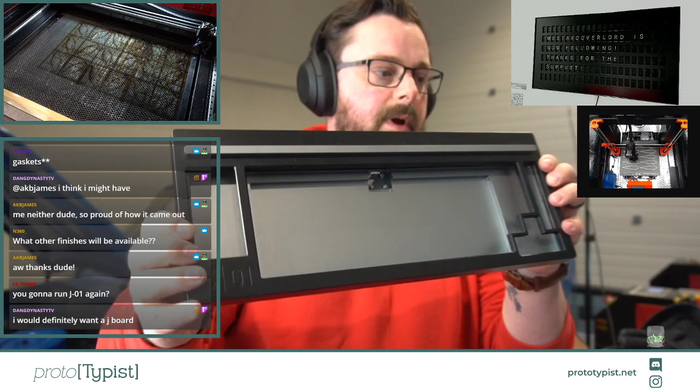I can show you the other top, actually. Let me put the other top on this, so you can see what the actual black group buy top is going to look like. There you go, that's the actual group buy colour. It's a little bit dusty because it's been in the workshop. It does have the J01 logo on it as well.

Such a good looking board. I was thinking something else for a TKL, James, and you know what I'm thinking.

Yeah, J03 will be a Mini 1800. The J01 might run again - there will be some extras, not a huge amount, but there will be some. So watch out for the extras, probably towards the end of summer, maybe September time, maybe a little before, late August or early September, for the J01 extras.

J01 would be pricey as hell right now, dude. I've had a conversation with the manufacturer this week where they want to charge me more before they ship it. That's not been a fun conversation. The price to ship has also gone up significantly. When I quoted it last year, it was going to work out about $9 a board to ship from China to me, and it's now looking at closer to $45 a board. That's a lot of money.

J04, the 40%, yeah, it's called the J0.4. The design's actually all finished on that, we just haven't prototyped it yet, but we will do it at some point soon I would think. And the J03 design is like 90% there, I think, if James reminds me correctly. Probably some tweaks we need to make because it hasn't been looked at for a while, but yeah.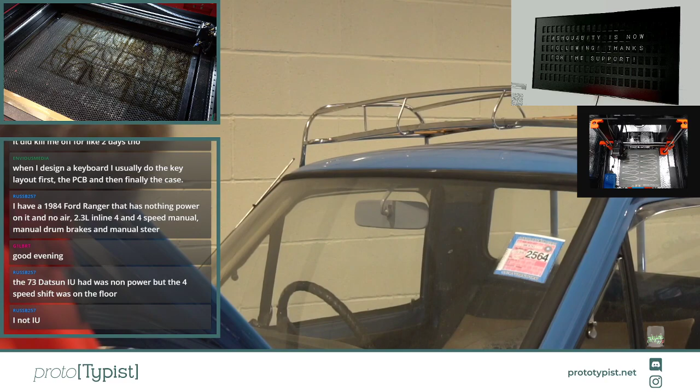4-speed shifter was on the floor? Yeah, this is column shift. It's difficult for me to show you on this camera angle, but let me twist the camera around a little bit. The actual column shift is on the side of the steering wheel. Let me see if I can reach in and show you guys that. You probably can't see it. Let me zoom the camera in on that bit of the car. Let me see if I can show you the column shift. I'm not sure if you'll be able to see it from that angle, but that's the column shift just there. I'm not sure if that's showing or not quite, but that's the column shifter.

Gotta love a good car. There we go, back to normal. Column shift manual is so difficult to get used to. I only have manual cars, never had an automatic, but column shift is a whole new kettle of fish. It's wild, that's awesome. The whole truck's awesome, it's so cool. Even the little roof rack, how cool is that? I had that custom made by a guy in Thailand. Really cool.

EnviousMedia says they're excited to get PCBs in for 3 other keyboard designs and a microcontroller they've made. Nice, congratulations man. This hobby is addictive. I went the other way, I just buy keyboards and then make stuff.

It's fun. Yeah, the bushings have all been replaced on that. The last thing to do is actually replace the pin that holds the column shift arm into the mechanical parts itself. That's the last thing to change, but all of the bushings throughout the whole column shift have been replaced. I 3D printed some first to make sure I got the size right, then we created some on the lathe out of brass. So they're fully brass, all lubed up. It changes gear nicely now, apart from needing to change the pin that holds the final arm into the mechanism. That's the last thing to fix.

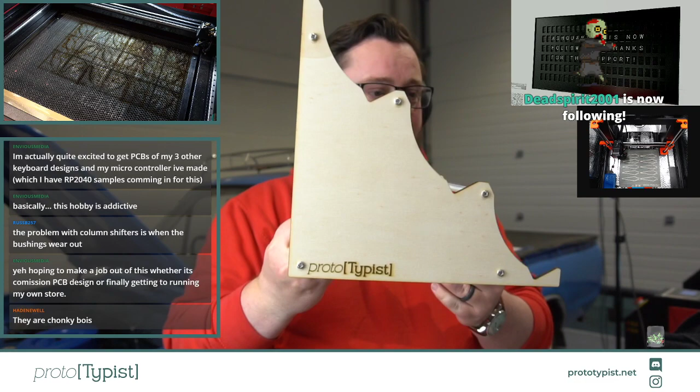The chunky boys are so big. I might do some tweaks and changes just to neaten up, make these more rounded because they don't need to be this angled anymore since it's not the bottom. So I might tweak these and make them a bit more rounded on the tops. I might make the top a little bit thicker, just so it looks nicer, and bring this line out a little bit. Same here, I might just drop this front edge down a little bit to make them look nicer and more rounded. But solid work, pretty happy with them.

James is down for one. James, you know you just get one.

I need something to display all those Petrichor prototypes. Dude, I found my original Petrichor prototype the other day, just in the back of the workshop. It was nice, I would like to have one. Cool, I'll get some on the store.

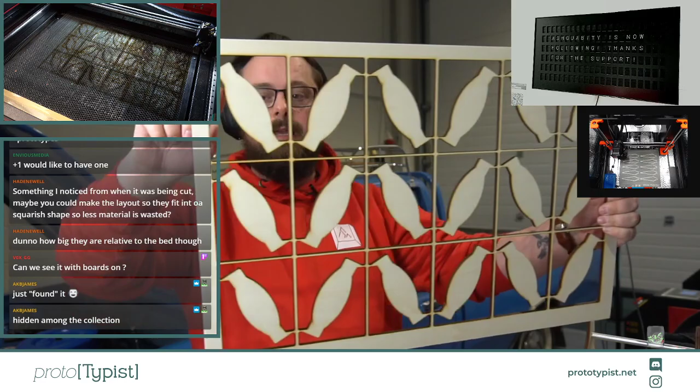So when I cut these out normally - this is just a prototype, from a Word document - you can see that I cut them like this. What I actually do when I lay them out for actual production is lay them out slightly differently. You can see here, this is basically a finished sheet - this was one side, this was the other side, then another one, and so on and so forth.

Basically, these are two left sides and two right sides. The left and right sides are slightly different because of the orientation of the text. Bear in mind these haven't been cleaned, they're straight off the laser cutter, so they're a bit dusty. But because of the text orientation, you have a left and a right which are mirror images of each other. Apart from the text, they're the same, so we have to do a left and a right.

But when I do two of the same, they're cut out of the material like so. That's how we cut them out of the material. I will absolutely do the same. It's just for a prototype, it doesn't make a difference, but when we're doing production runs to make sure we use the material the best we can, we absolutely cut them like that.

Can we see it with boards on? Dude, you've missed it, I had boards on earlier on. We had an Alice style board on it.

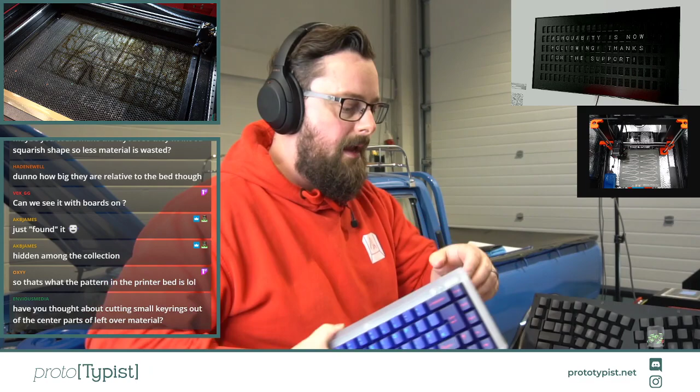This is so hard to pick up now. There you go, keyboard stand. We also tried it with a TKL on it and a few other boards as well, so you can scroll back and have a look at that if you want to.

Something I noticed - don't know how big they are relative to the bed though. The pieces of material are actually quite small. You can see on the laser cutter, if you look at the top small part here, the piece of wood we used actually only comes up to here and here. So we do have all of this area of the laser bed that we aren't using. It's just that the material came in that size rather than me ordering a custom size material for it.

That's what the pattern in the printer bed is. So the issue is when we're cutting plywood, it actually has a resin that holds the different layers together. That resin kind of melts and drips into the laser bed, and that's what leaves the marks you can see. When we're cutting just plastics, those marks don't appear, and when we actually laser over the top of them, those will disappear over the next couple of weeks. So as we use the laser more, that will disappear too.

Have I thought about cutting small key rings out of the center parts of leftover materials? Maybe, it's something we might do in the future. I actually have a few of these sheets, and they were positioned perfectly so that the edges are all of a certain thickness, mainly because I want to use them for something else as they appear like that.

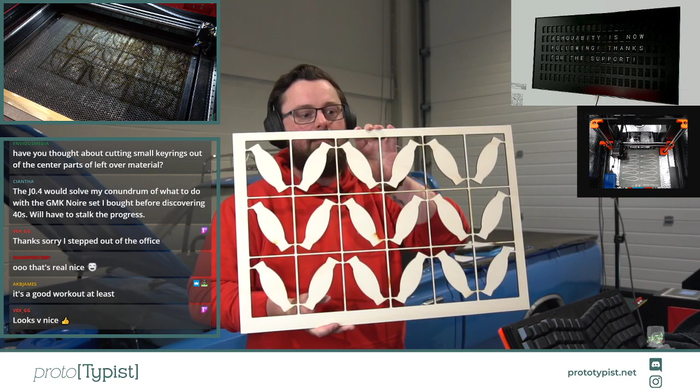So yeah, I want to use these for something else. I've cut them so they have like a frame of certain dimensions, so they're cut that way for a specific reason. I have quite a few of them. I have some black acrylic ones as well that are cut like this - this is black acrylic, but they're cut that way for a reason. The material won't be wasted.

It's a good workout at least, dude, it's so hard. A PT logo keyring could be a cool little bonus thing. Yeah, maybe. Look like birds kissing - it's kind of cute, I can kind of see that. But yeah, maybe we'll do some PT logos.

Trellis for the garden, no. Think more about my stream table that I'm making, which the parts of the wood are actually here for, although they missed a piece. When I ordered it, I ordered all of the pieces of wood cut to size, and one of the pieces of wood is missing, so I can't actually build the stream desk at the minute. But once I can, you'll see me build a stream station. It's going to be 1.75 meters tall, 2 meters wide, on casters, on wheels, and I'm going to be able to move it all around the workshop and stream from anywhere in here rather than just in a fixed location.

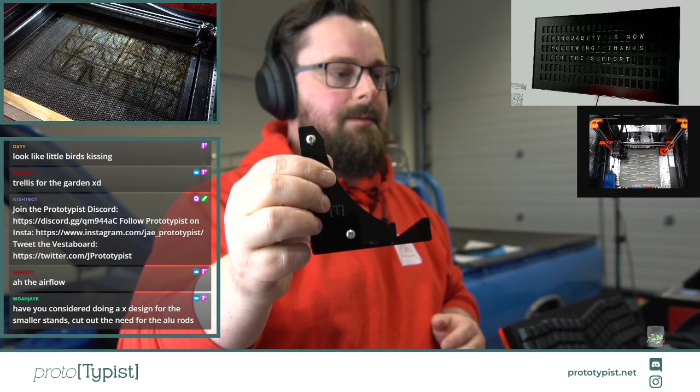This way they're super strong. This will hold 5 kilograms with no bows or shakes about it, and it won't break, bend, or buckle. If you do it the other way, I'm always a bit worried that acrylic will fatigue over time, whereas these aluminum rods are so strong. I physically can't bend these, and it's not even putting any stress on them because of the way it's designed. So I prefer not to. Other people can do that if they want, but I'm not going to sell a product that I don't trust and believe in myself.

The 3D printer's finished, yeah. Shall I go get the 3D stuff off the 3D printer and show you guys that?

So this is the 3D print sheet. These are stem tweezers that we've printed off. Oh, I shouldn't be showing you that because it's a sale. Hold on, let me get rid of that the best I can. There we go. These are 3D printed stem tweezers that we're using.

We give these away for free with anyone who orders any switches. This is the standard Prusa sheet, so if anyone's interested in 3D printing, this is how easy your prints come off. You just flex the board a little bit, and then they just pop off.

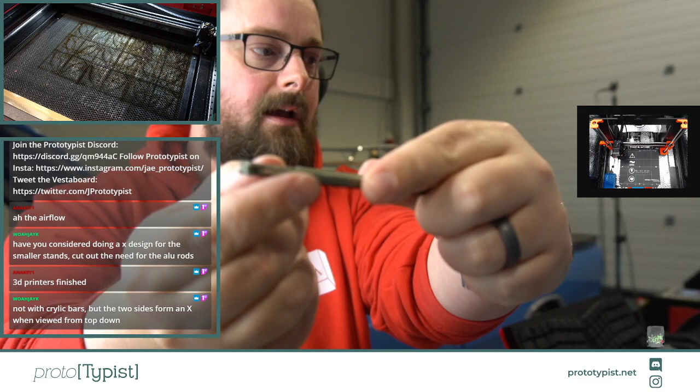Now the cool thing about these is we actually ran out of filament halfway through printing them, so they're mostly this lovely beige, kind of golden color, but on the underside they're black. You can see here, this is actually a bridge that prints in midair, so you can see that's actually the beige color. The black only goes a really thin layer, but you can see the black on one side and beige on the other, because we ran out of filament halfway through.

But the really cool thing about this is that they hold stems together without any pressure, so you don't need to put any pressure on it for it to hold and grip onto a stem. They're pretty cool. These need a tiny bit of post-processing, but not much, and they just pop off here. These are my own design, inspired by other people's designs, but they are my own. They're slightly shorter and have more pressure to hold onto the stems than some of the more open source designs.

So yeah, I just give these away, print them off and give them away. Anyone who buys switches from my store gets a free one, simple as that. I'm going to put this back in the 3D printer and show you how I control it. We'll set it going, doing exactly what it's printed, and print another 10 off. So I'll show you how that works, guys.

So I'm just going to put the printed sheet back in here, the print sheet. What you can't see is that I'm closing up the cabinet there as well. There is a cabinet that holds it all in place.

So now that's all sorted, I can show you guys how I control it. I have an app on my phone called Telegram, and in here I have a bot that I can control, and I can just send a message via the Telegram app over to the 3D printer. So I can type in /files, hit enter, and it gives me a list of all of the files on the machine.

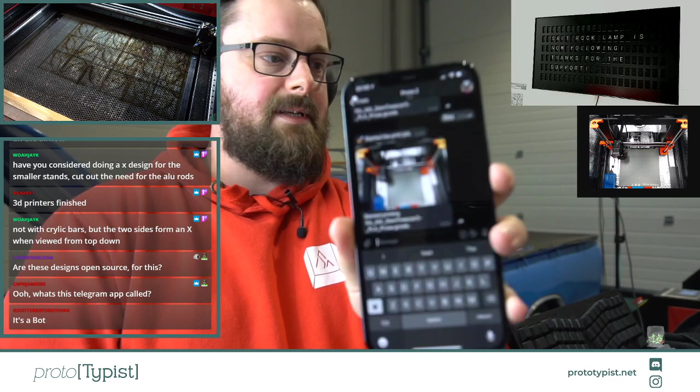Now it's started the print job, and it sends me a picture. If you watch the printer screen on the side, you'll see that it'll start printing in a few minutes. It's going to warm up, do bed leveling, and then start printing.

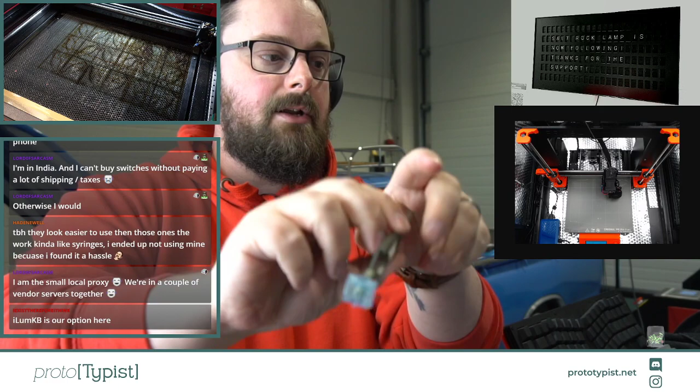If you're just doing the stem, then you can lube the stem without having to touch it. You can actually use the tweezers to pop the stem back into the switch, and you can gently let go of it. Then you can pick them up that way as well if you need to. No pressure on this. Just hold onto one leg so you can see. Look, they just hold onto the switches just as they need to.

Yeah, cute switches. Coming soon.

Okay, so you can start to see now on the 3D printer, it's actually got the shape of one of these that it's printing. What it does is it prints this black side. That's the bit it's printing now, the black bit. This part here, it doesn't print till later on because that's actually a bridge and it's floating in midair, so it prints that in the air. You can see there, it's raised up. It prints that in the air.

iLumKB, Louis is a great guy, so I'm sure he'll do you whatever you need. You're a small local proxy, we're in a couple of vendor servers together. Oh, right, nice. Sorry, I apologize if I didn't realize who you were. I apologize.

So there you go, guys, you can see the 3D printer's now working. It's now on the second one. It'll lay out basically 10 of them, and then it's just going to do layer upon layer upon layer. It's going to go from there.